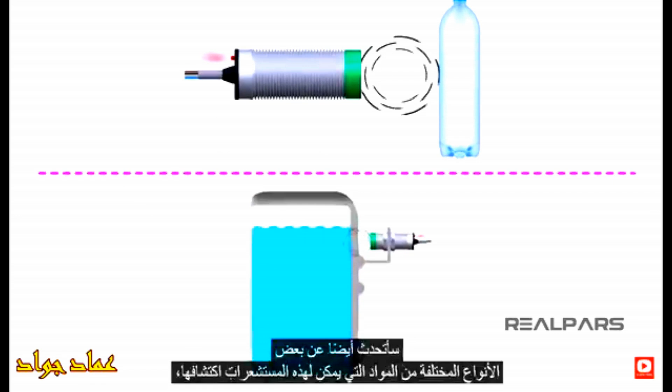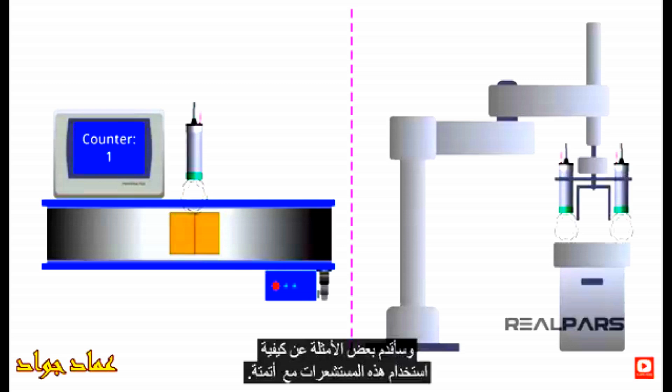In this video, I will be talking about capacitive proximity sensors. I will explain what a capacitive proximity sensor is and how they work. I will also talk about some of the different types of materials these sensors can detect, explain the main parts of these sensors, talk about some of the different types of capacitive proximity sensors, and give some examples of how these sensors are used with automation.

A capacitive sensor is an electronic device that can detect solid or liquid targets without physical contact. To detect these targets, capacitive sensors emit an electrical field from the sensing end of the sensor. Any target that can disrupt this electrical field can be detected by a capacitive sensor.

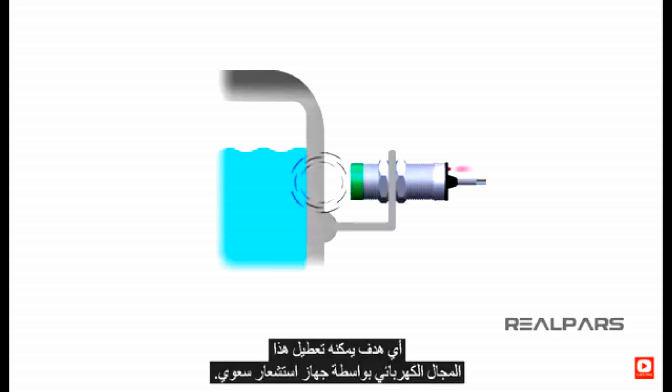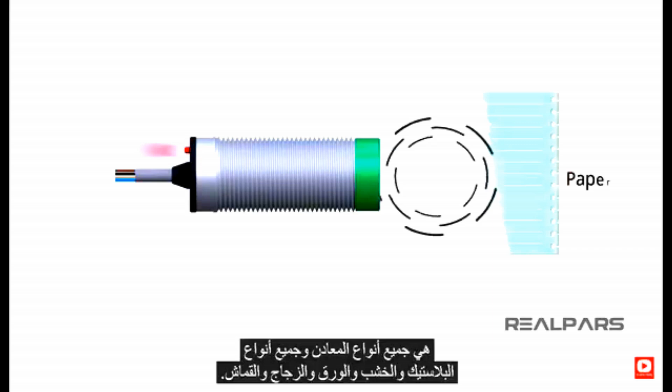Some examples of the solid materials a capacitive sensor can detect are all types of metal, all types of plastic, wood, paper, glass, and cloth. Capacitive sensors can also detect liquids like water, oil, and paint.

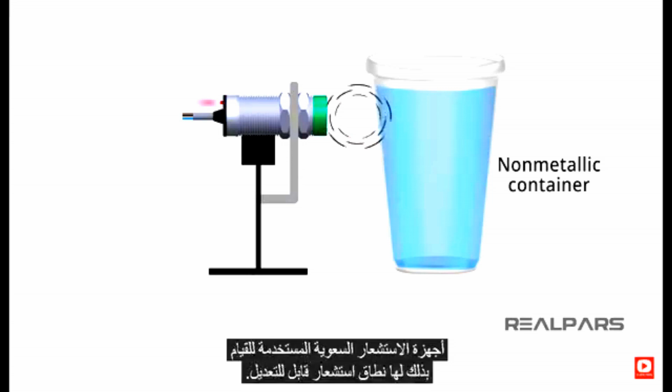Some capacitive sensors can be used to detect material inside a non-metallic container. The capacitive sensors used to do this have an adjustable sensing range. I will explain how to adjust these types of capacitive sensors with an example in just a bit.

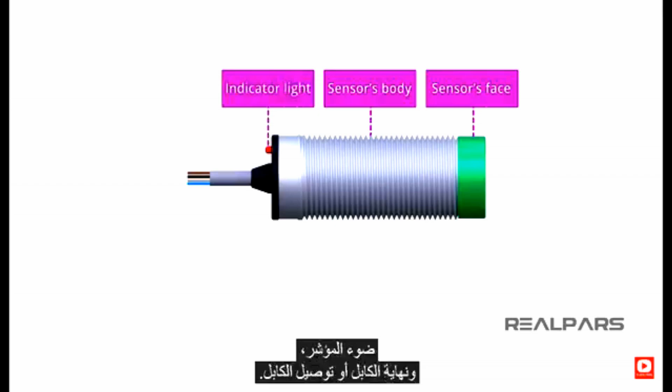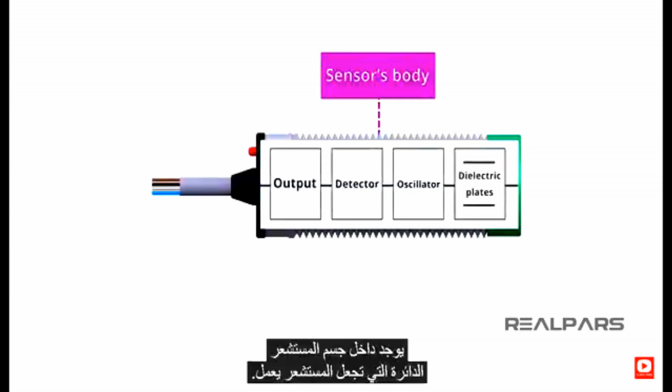Capacitive sensors have four main parts: the sensor's body, the sensing face, the indicator light, and the cable or cable connection end. If the sensor has an adjustable sensing range, it will also have an adjustment screw to adjust the sensing range. Inside the sensor's body is where the circuitry is that makes the sensor work.

The sensing face is the part of the sensor that is used to detect the targets. The indicator light is on the other end of the sensor from the sensing face. This light turns on when a target is within the sensor's sensing range and turns off when the target is out of sensing range. The sensing range of a capacitive sensor is the maximum distance a target can be detected from the sensor's sensing face.

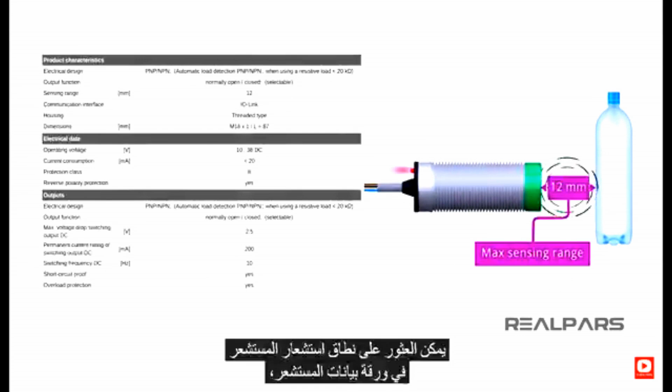An example of being within the sensor's sensing range would be if the target is 6 millimeters away from the sensing face and the sensor's sensing range is 12 millimeters. The sensor's sensing range can be found on the datasheet of the sensor, or you can look it up on the manufacturer's website.

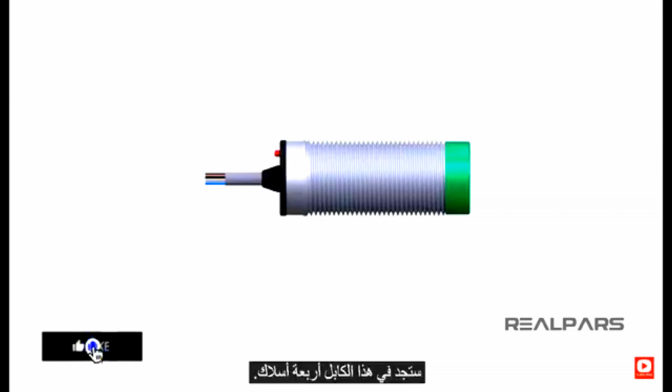These sensors can be purchased with a cable already attached to them, or they can have a connector that the cable screws into. In this cable, you will find 4 wires. The colors of these wires are brown, blue, black, and white.

The brown wire gets connected to 24 volts DC positive. The blue wire gets connected to 24 volts DC negative. The black and white wires are the sensor output wires.

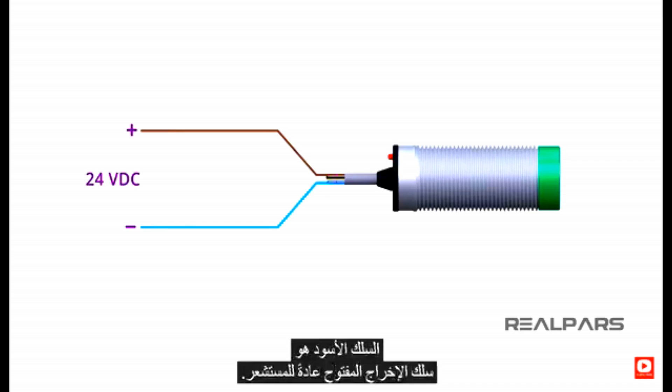The black wire is the sensor's normally open output wire. The sensor will send out a signal on the black wire when it detects the target. The sensor stops sending the signal when it does not detect a target.

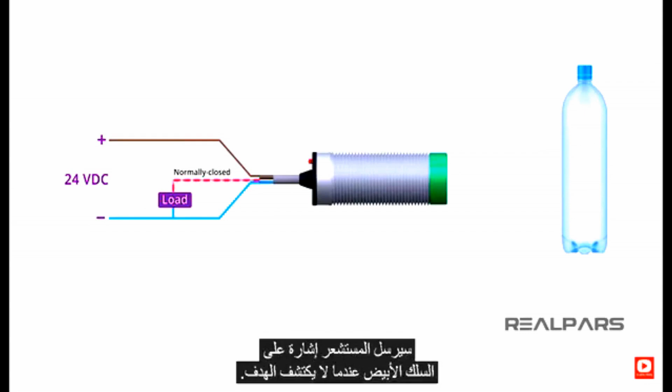The white wire is the sensor's normally closed output wire. The sensor will send out a signal on the white wire when it does not detect a target. The sensor stops sending this signal when the target is detected.

A capacitive sensor's outputs can be a positive signal, or PNP, or a negative signal, or NPN. Depending on how the sensor outputs will be connected will determine what style of sensor outputs are needed.

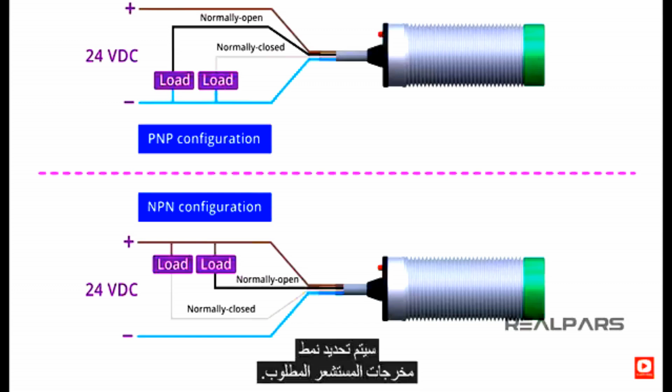If the capacitive sensor has an adjustable sensing range, it will have an adjustable screw. Turning the screw clockwise increases the sensitivity of the sensor, and turning the screw counterclockwise decreases the sensitivity of the sensor. Mounting a capacitive sensor can be easy.

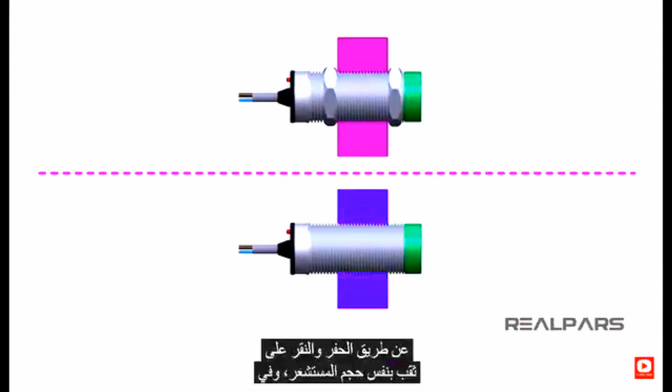It mostly depends on how the sensor is going to be used and where it's going to be located. Some styles of capacitive sensors can be mounted by just bolting them into place. Other styles can be mounted by drilling and tapping a hole the same size as the sensor, and sometimes using a bracket to mount the sensor is the best solution.

Now, I will explain how to set up a capacitive sensor to detect water in a non-metallic container. In this example, I will use a drinking glass made out of plastic for the container, and a capacitive sensor with an adjustable sensing range that is mounted on a post to detect the water.

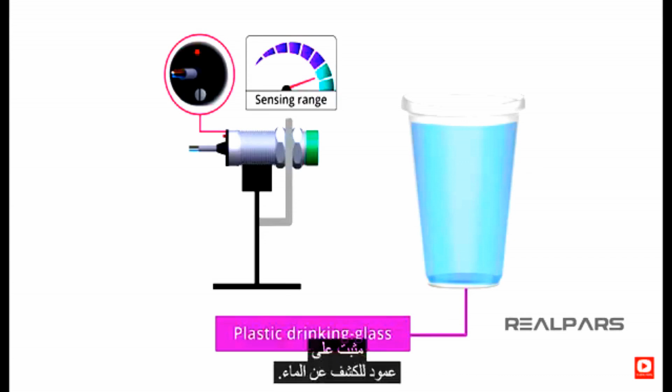Notice when I put the empty drinking glass next to the sensor, its indicator light turns on. This means the sensitivity of the sensor is set too high and will need to be adjusted. To adjust the sensitivity of the sensor, turn the sensitivity adjustment screw counterclockwise until the indicator light turns off.

Now, I will fill the drinking glass with water up to the sensor. Notice the indicator light turns on. If I remove some of the water to where the level is below the sensor, the indicator light will turn off. This means that the capacitive sensor is adjusted correctly.

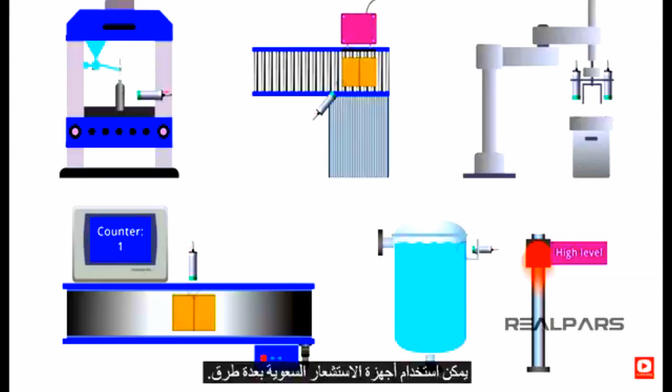Capacitive sensors can be used in many ways. They can be used for part detection on workstations, conveyors, and robots. They can also be used for counting and checking liquid levels.

When these sensors are used for part detection, the sensor just sends a signal to the workstation, conveyor, or robot so they know when the part is there. A capacitive sensor can be set up on a conveyor to trigger a counter so that it can count how many parts have been built.

Capacitive sensors can also be used to check for high or low tank fluid levels and to trigger alarms for each.

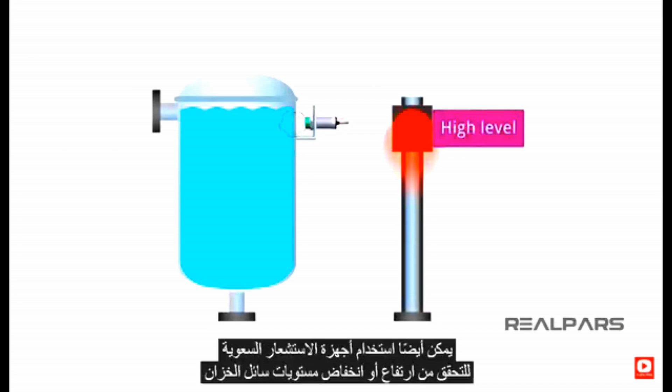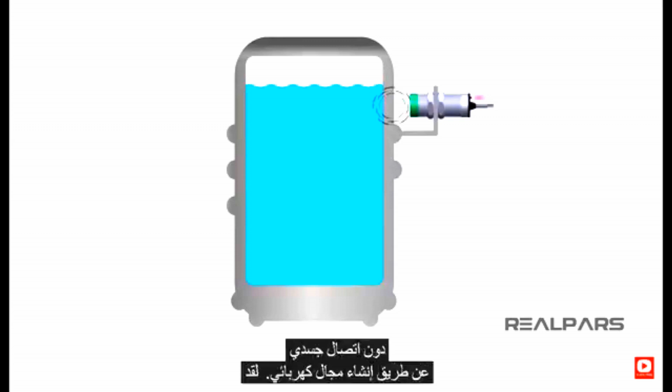In review, by watching this video, you have learned about capacitive sensors, that they detect most solid or liquid targets without physical contact by creating an electrical field. You learned the four main parts of a capacitive sensor and that they have many different options to fit the needs of most applications.